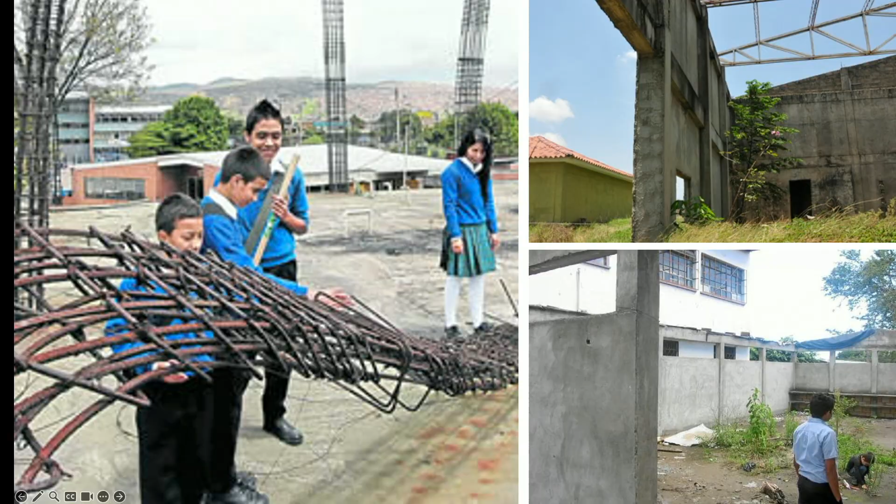It all started when we finished architecture school and had my first job working for a professor, seeing how a lot of the work that we were doing ended up in rolls and flat files and nothing happened of it. Granted, many times, if the financial conditions don't allow for things to happen, like holes get dug and spirals don't get built. But a lot of what we were doing was actually dealing with bringing infrastructure to these really poor settings around Colombia. And the idea that we were producing files and printing them and jumping onto the next one started bothering me.

Because I grew up learning that architects are kind of this, right? They are these people that go out there on sites and inspire their workers and know how to build and know how to cut stone and know how to do things. And this is what we were doing.

Soon enough, I realized that it wasn't just this perception I was getting, but it was a generalized idea. In 2011, Obama was invited to the Pritzker Award ceremony. He went up on stage and said, as Tom mentioned, my interest in architecture goes way back. There was a time when I thought I could be an architect, where I expected to be more creative than I turned out. So I had to go into politics instead, and everyone laughed.

I was very furious at this phrase, because here's this guy that I truly admire saying that we are the lucky ones because we're creative, and this poor guy, he's not creative, so he has to be president of the United States. This notion that since we're creative, we're lucky really started bothering me, and I wanted to change that.

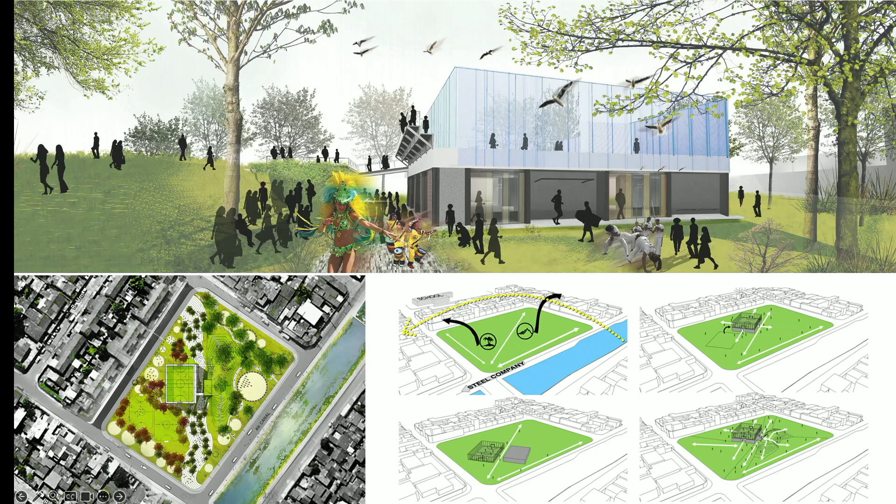So we did a new thing, but ultimately what was important for me is I got the possibility of being in the middle of everything, which I thought is where we should be, because I was handling the donations, handling the site, dealing with the mayor's office, dealing with the client, dealing with the community, and ultimately doing the project. It was this weird location in Rio that no one really knows about, way, way out west.

It's not the beautiful beaches or the kind of more Hollywood-esque favelas. It was the truly deep Rio that no one talks about. It was this kind of abandoned soccer pitch, and we redesigned the project. I did this process where I would go and present it to the community and get their feedback and see how we could improve it or change it or make it better or worse.

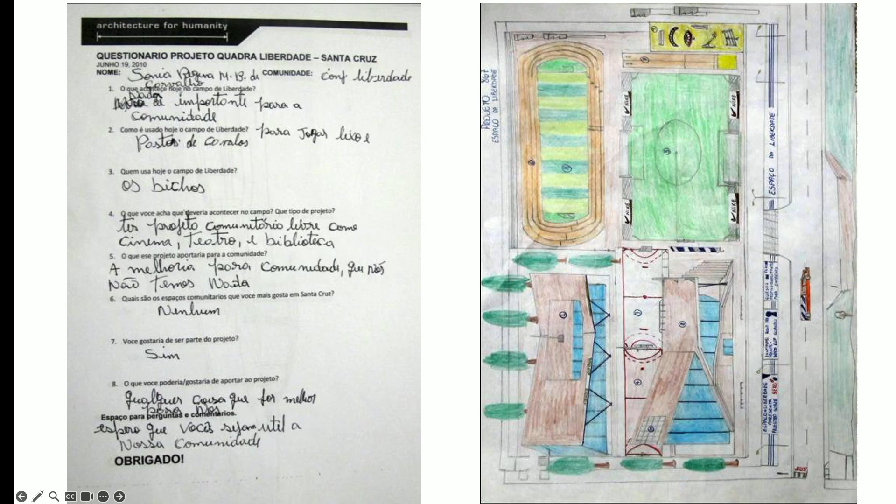It was just a really small project, kind of this small ramp with a soccer pitch in front of it and a small multi-use room inside. The idea was to create a theater on top, and then the educational and soccer spaces on the bottom. And four months into my life in Brazil, I was able to begin the construction of this project.

That was really amazing for me, although the community was still kind of not convinced. This is a very telling image of what every day looked like. I did a lot of local hiring along with Getulio. He's the community leader, and he helped me hire locally.

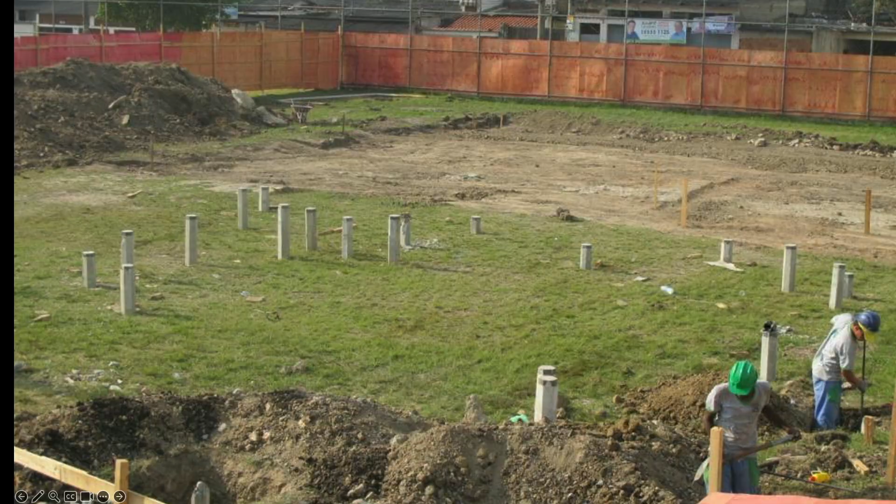Construction began, and I was living on the site, really dealing with the realities of being an architect who builds his own projects, kind of struggling with all the decisions I had made because I couldn't go back on them anymore once they were built. A year out of architecture school, I was doing this and dealing with the other complexities of being in these settings, because it was during a political cycle.

Over here you can see this is Dilma, she wanted to get reelected, and there was Lula and so on. We had a lot of these political caravans saying that they were doing the project, so I had to do community meetings that kind of looked like this on this street.

Oh, I don't know what this...

How do I get out of this? Okay.

Meanwhile, the process was continuing to happen, and when we hit the stage of the ramp starting to be built, rumors that we were doing a second-level highway on top of all the rural fields started to emerge. So I was able to get a spot on community radio every Wednesday at 1 p.m., where I'd do a show with Colombian music and answer phone calls to deal with all the rumors that were going on.

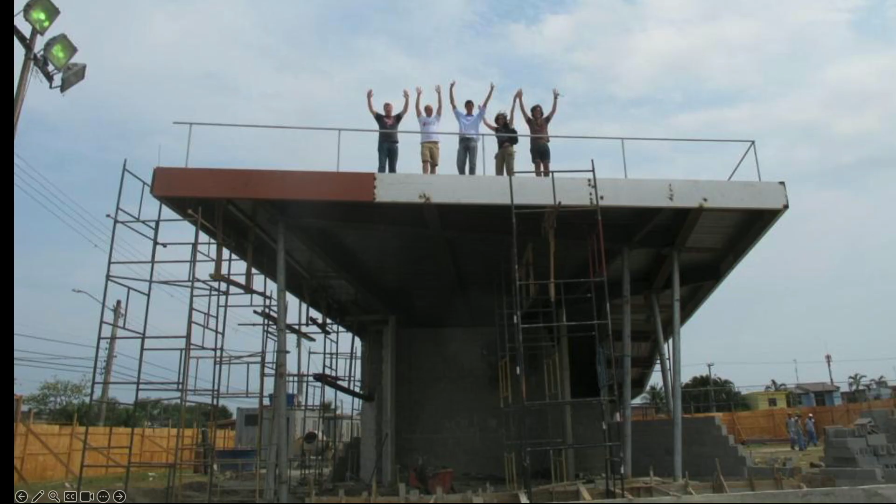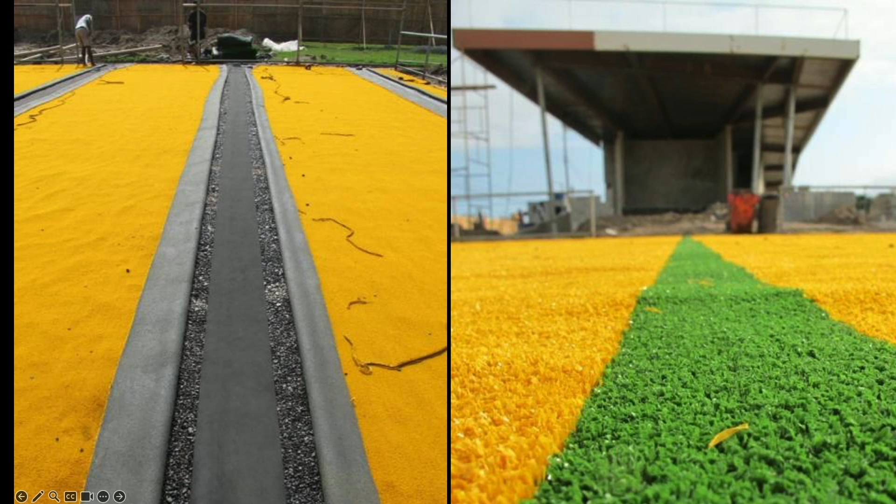We tore down fences and reutilized them to build the new fences for our soccer pitch, and brought really high, top-of-the-line finishings. Well, it wasn't marble, but it was really good finishings to a site that wasn't used to getting high-quality architecture built in it.

Ten months after I moved to Brazil, I was very happy to open the project to the community, and we had the men's and women's homeless World Cup teams of Brazil play the first game on our pitch.

Throughout this whole time, my parents were very scared that I'd moved to a favela, worried about what was going to happen to their kid. So I set up a blog where I would post pictures of the progress of the job every evening.

For some reason, the First Lady of Colombia saw that blog and learned there was this young Colombian architect who liked to go to difficult places and build with communities. She contacted me and said she wanted to set up a program focused on bringing high-quality services for early childhood to the war-torn areas of Colombia, and asked if I wanted to be her architect. So I moved to the presidential palace from the favela, and I started learning a lot about early childhood.

I was struck by the notion that the best investment a country can make is in early childhood.

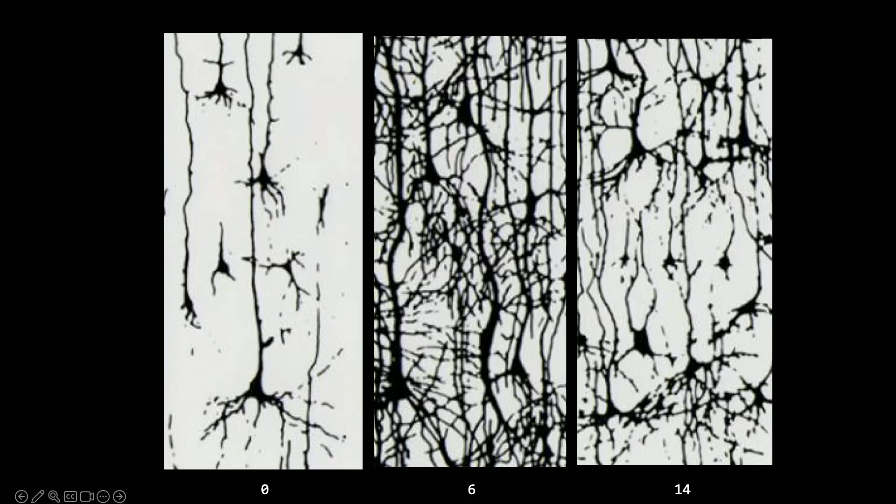This is a CAT scan of a child's brain at 0 years old, 6 years old, and 14 years old, based on research done by James Heckman at the University of Chicago. He was able to prove that most of the neurological activity in a child's brain peaks at age 6, and from there things solidify and decline. So whatever you can do from 0 to 6 years old is actually the best investment a country can make in itself.

With that understanding of the importance of what we were about to embark upon, we met our first site: a town called Villarrica, 16,000 people, 67% poverty rate, 20% illiteracy rate, a typical Colombian rural reality.

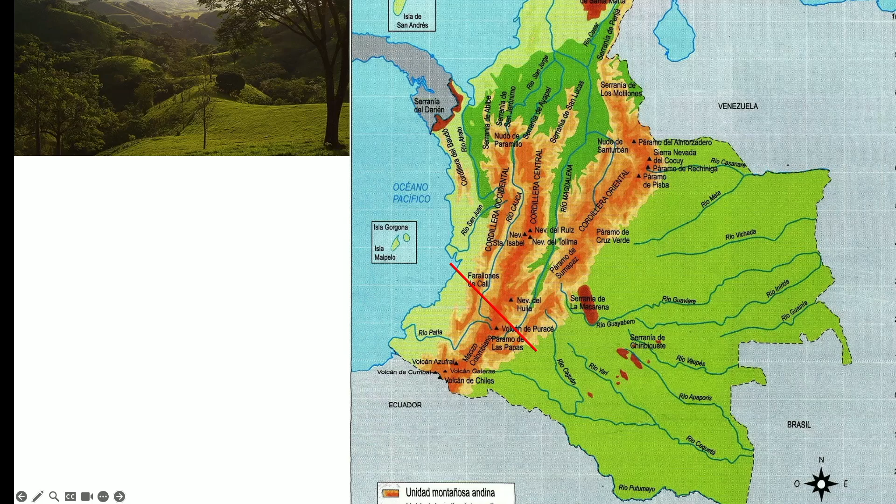But one you can understand through its geography, because if you were to follow this red line on the screen from right to left, or bottom to top, you'd start in the Amazon jungle, then go through the snowy peaks of Cauca, and end at the Pacific coast. This means you have every type of soil you want in the world, and access to the ocean, like you've seen in the movies about Colombia.

On the other hand, we're on the equator, which means the rain cycles are hyper-accelerated, so we permanently have rain, condensation and evaporation happening at the same time. This is the cloudiest and most humid part of the world, which also means you can't patrol it by air. That's why all the drugs end up leaving from the Pacific coast.

And sure enough, that's where Villa Rica is. While we were doing the project, the police station got bombed twice. These were the realities we were dealing with.

We were also dealing with the reality that the kids' kindergartens at the time were just homes of very humble, hardworking women offering a room in their house to run a kindergarten. So we started visiting these homes to see what we could learn from the work they were doing, and held a lot of community meetings to see what the kids wanted, what the teenagers wanted.

They wanted a cinema, a catwalk for hairdressing pageants, and all sorts of other things, along with what the mothers and the community wanted. We ultimately did a project inspired by bamboo groves, which are native to this area but have mostly been cut down for sugarcane fields.

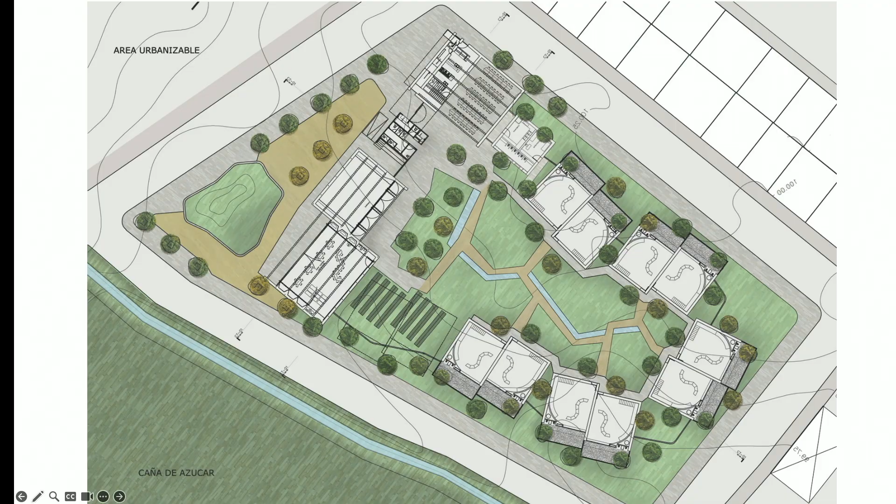We proposed to do this project we call El Guadual, the bamboo grove. It's a kindergarten with 5 different pairs of classrooms around a central courtyard with a little string of water, and a more communal block in the front that opens up to the street or to the back. These were the drawings we brought to present to the community.

What we were really doing was trying to work with what was there, because these are places you can't really bring materials to — you get guerrilla checkpoints, and when you're bringing materials they steal them from you and the project gets defunded. You don't have permanent water or electricity. So I wasn't necessarily an environmental or green architect, but the realities pushed me towards becoming green by design, not green design.

We worked with local materials and local workers. We designed systems that would bring sun in so we wouldn't rely on energy or ventilation systems, and we would be able to collect all the rainwater we could, learning a lot from the place through all the visits we made to the houses.

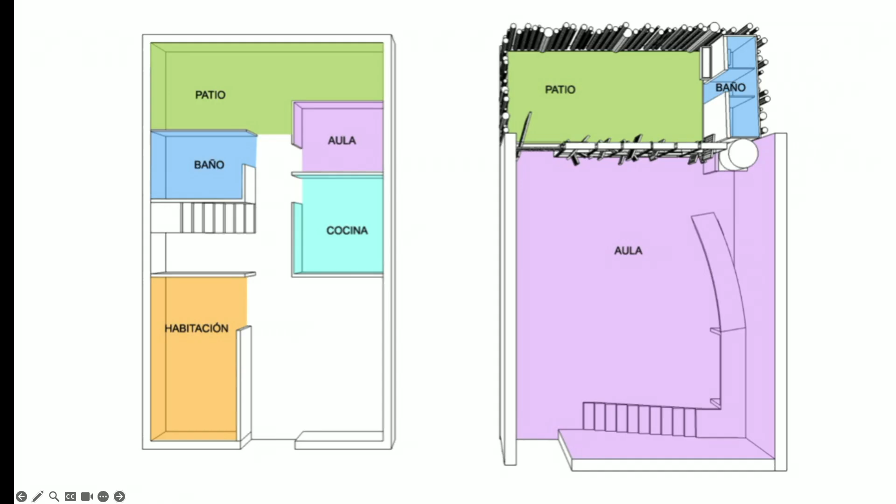On the left you see the floor plan for the house I showed you, Sulman's house — the purple square was a classroom. What was beautiful about this kindergarten inside this woman's house is that when the kids wanted to go out to the field, they could run out and play with the lizards. If they wanted to go to the bathroom, they could just go. If they were hungry, they'd go to the kitchen.

If they were tired, they'd go into her living room — versus what we were seeing in other kindergartens, which were just very clean, simple, squared rooms, where a kid who wanted to go to the bathroom had to ask the teacher to bring him, or wait for recess to go outside.

When we thought about what that does to a child's brain, it basically limits the possibility of being a decision-making individual, because everything in the day is plotted out and decided for you — versus what was happening in these homes, where kids decided what to do, when, and how. Considering that after kindergarten these kids enter school, and in school they have to choose which side of the war they want to be on, the possibility of seeing more options and becoming a better trained individual decision maker became really important for us.

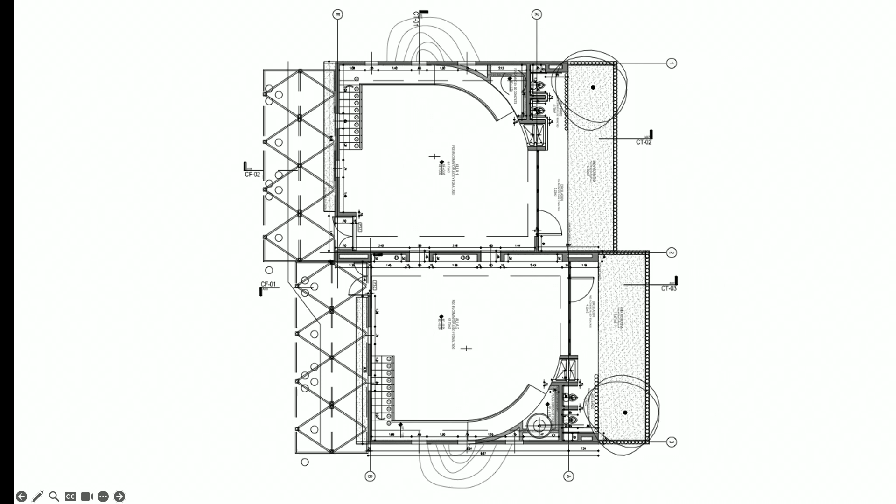So the classrooms we designed ended up having their own bathroom, their own patio, their own stairs, 7 different ways of going in and out. They were interconnected to the classroom next to them, with little mountains to go out onto. The teachers found it very difficult to teach in these rooms, but it was great for us because we were forcing the teachers to pay attention — they weren't controlled, they were really able to be wild and go all over the place.

We presented the project to the community, and thankfully it was approved. A typical construction process started, except we could only do one shipment of materials — the second always gets ransacked by guerrilla checkpoints. So a lot of what we did was plan on building with local knowledge and local materials.

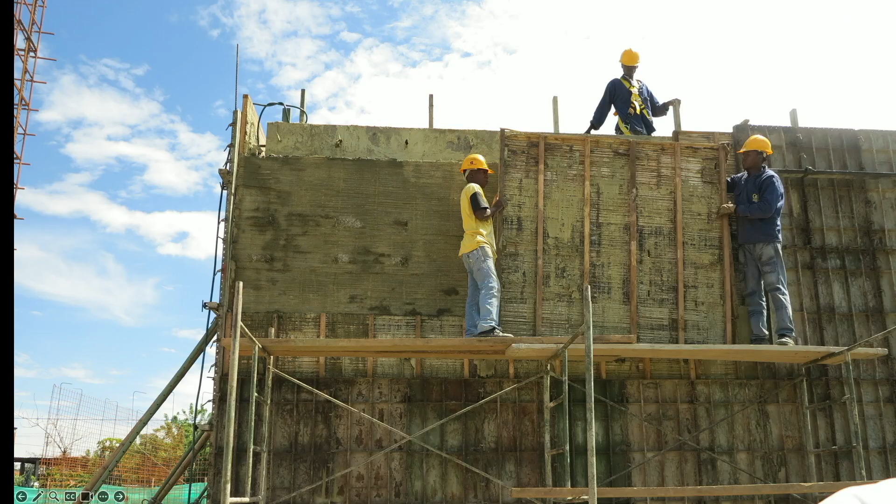We made the formwork out of bamboo sheets that the local builders used over there. We trained the women who were going to be the teachers to also be bamboo workers, so they could offer maintenance services afterwards and hopefully keep the place going well.

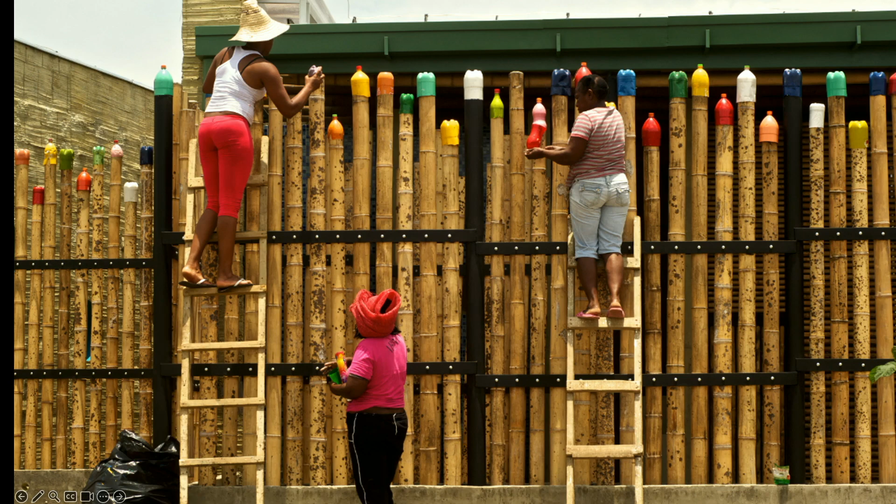We also did one specific strategy I was super proud of: we built a fence out of bamboo. The builder didn't want to do it because bamboo collects water since it's hollow in the middle. So we asked the mothers who were going to become teachers to collect soda bottles and paint them with their kids.

They had collected a bunch of soda bottles throughout the whole construction process. When the builder told us he wasn't going to build the fence unless we accepted an additional cost of PVC caps—4,500 caps, totaling about $10,000—we asked the women to bring their bottles and install them themselves.

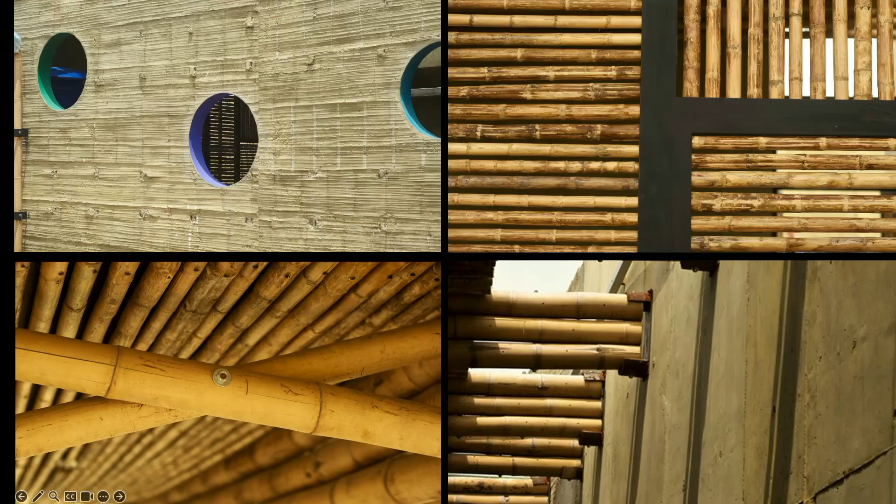This is what it looked like in the end. You could see the kids going up and down the mountains and crossing over, sunlight coming in, water being collected—all these things we were dreaming we could accomplish in this very forgotten rural area.

There was the outdoor movie theater the kids were asking for, and a bunch of other things. Word got around that the First Lady was doing this, so municipalities all over the country started asking for the same attention. We went up to the jungle and found a community that clearly needed shade, so we built a big shady kindergarten for them.

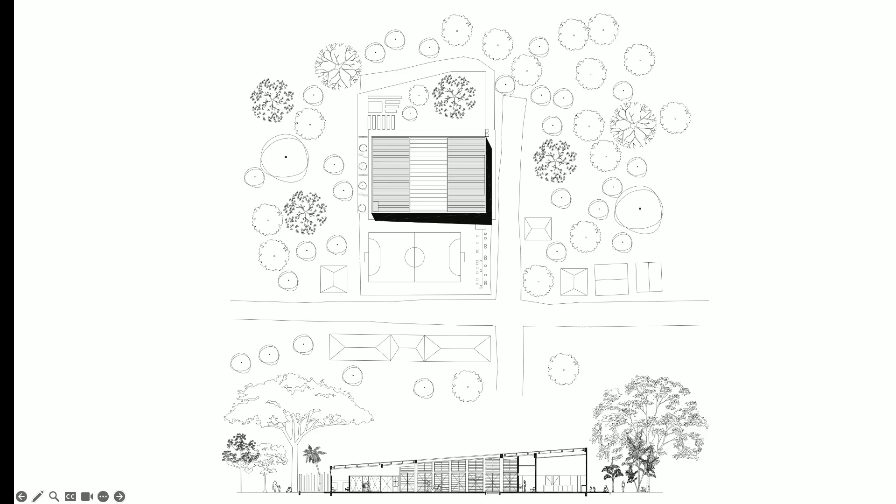Kind of a similar process. I'm just going to go through these really quickly. Five minutes? Oh. Okay, mentira—I thought I had 30 minutes, not 20. Anyway, that's tough, but we kept doing these projects all over the place.

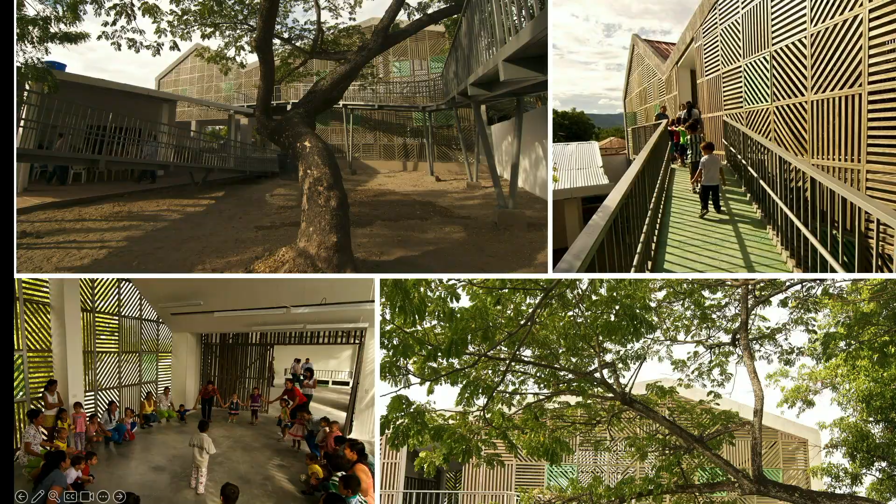Ultimately we built 32 kindergartens in those four years I was there, and it even became political propaganda. I was then offered the opportunity to go study in the US, and after a couple of scares throughout the country, I decided to take it.

When I finished school, I came back home and tried to operate the same way, but in an urban setting, which was a different challenge because there's more commercial interest involved. I understood that operating in the urban setting with the same mentality meant trying to find forgotten pieces of history that were close to extinction but had value for the place.

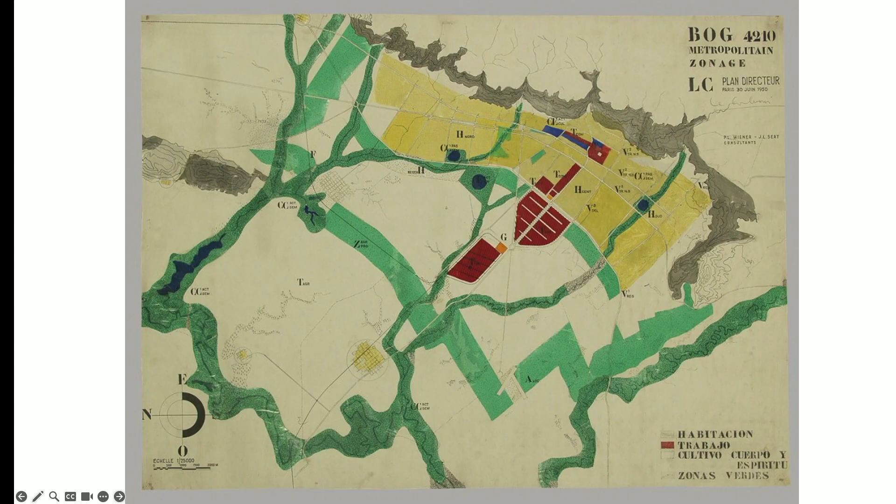Very few people know or even cared, but Le Corbusier did a plan for the future of Bogotá in 1950. None of it got built except a small, odd red polygon meant to be the industrial zone. The city grew immensely, and that industrial zone—planned to be the edge of the city—is now in the middle of it, the biggest collection of industrial buildings from the 1950s, which sadly at this point mostly don't operate anymore; they became obsolete.

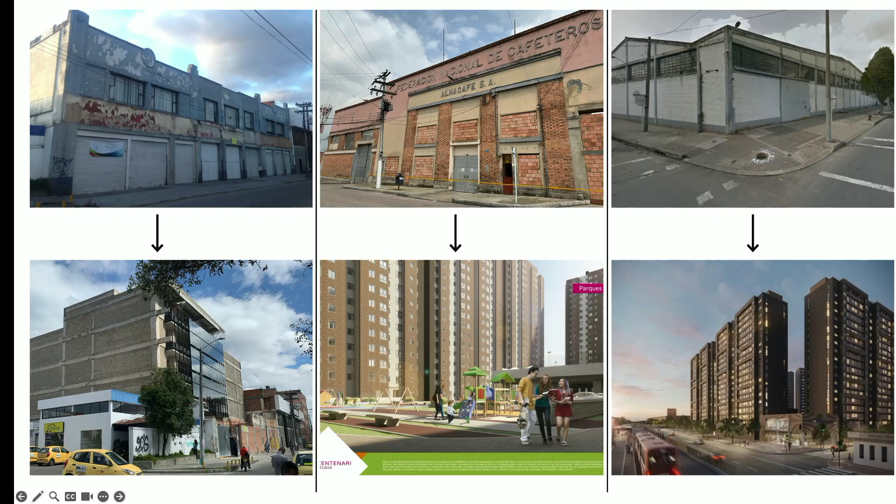Industry doesn't fit in the industrial zone anymore, so a lot of these buildings are getting bought up to be torn down and turned into gated communities. I decided to come up with a project no one asked for, to present a different way of developing the future of the industrial zone.

It became a research project and also a policy proposal for the city, suggesting a different way of using incentives to preserve these buildings instead of allowing them to be torn down. I did a full master plan for it, with ideas on how this could look and how living there could be.

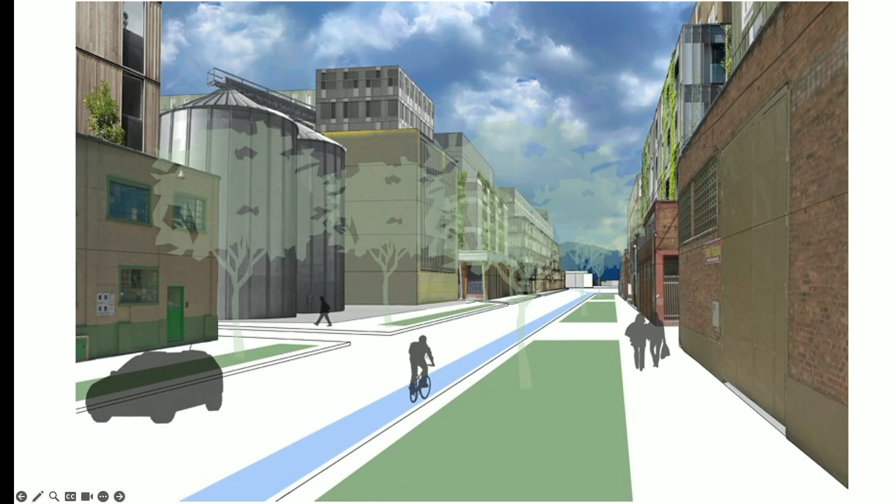I presented it to the planning office, and they congratulated me, thanked me, and showed me the door. I also presented it to a couple of private investors who said, listen, I don't want to be the first one—go ahead, do it, and when there's a market, I'm interested. I don't want to be the pioneer.

With the money I'd saved from working in the US, I turned the warehouse into studios that I then had to go market and find clients for. Fortunately, I was able to create a market that those developers didn't think was possible, and these spaces have been rented out for the past 10 years now.

Even these little office spaces, I turned into my house, and I was the first person to live in the industrial zone in Bogotá, a little bit illegally, but we're still there. With my partner, Anna Sokolov, we realized that if we really wanted the city to care about this place, we had to create an open public space, not just these closed workshops for people who pay rent.

So we were able to purchase this other warehouse that was in intense disrepair. It was an old car shop that was really falling apart. With really small architectural moves, we did a lot of maintenance on it, and turned it into a public space for large-scale historic art installations. While we were operating the art space, we also started modifying the rest of the building to turn it into our house.

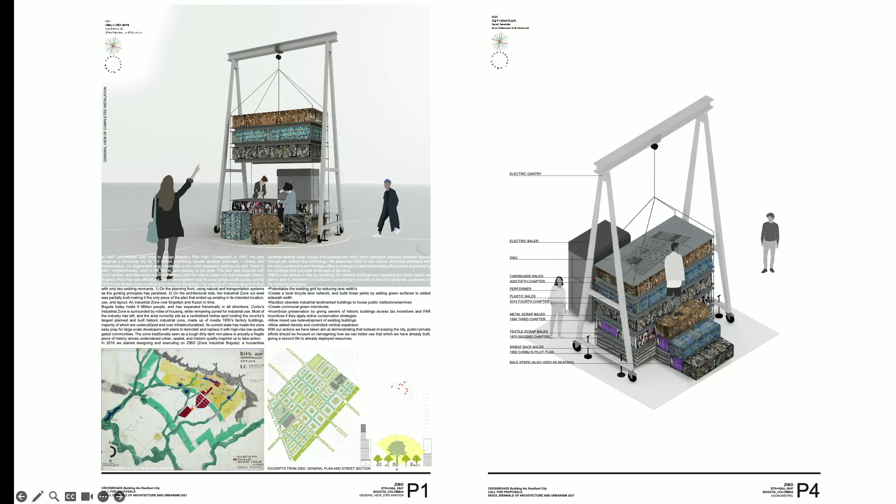I'm not going to talk about my house too much, but what's important is that throughout this whole time, this big urban project that I had proposed to the city actually got awarded in the Oslo Triennale. It was part of the neighborhood index, and it also was awarded in the Seoul Biennial of Architecture in Korea. The mayor changed, and the new mayor came in, and she learned about what we were doing and asked me to come in and present to her and to the planning office what our vision for the future of the industrial zone was.

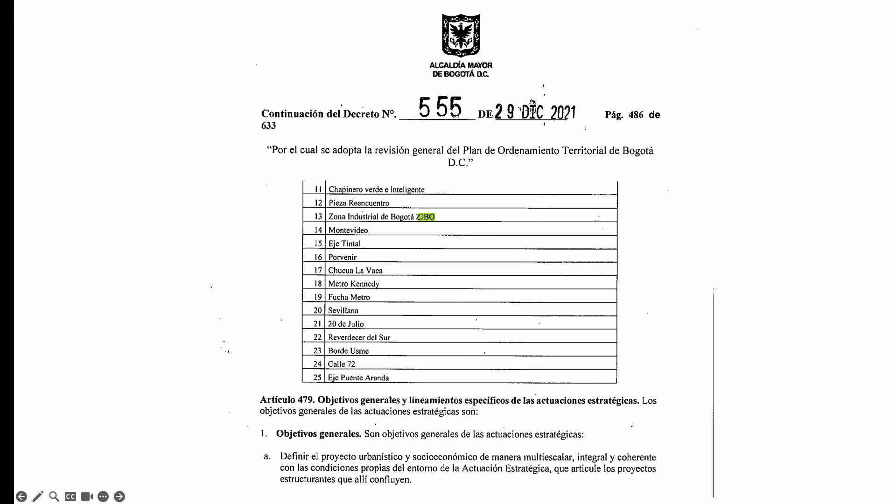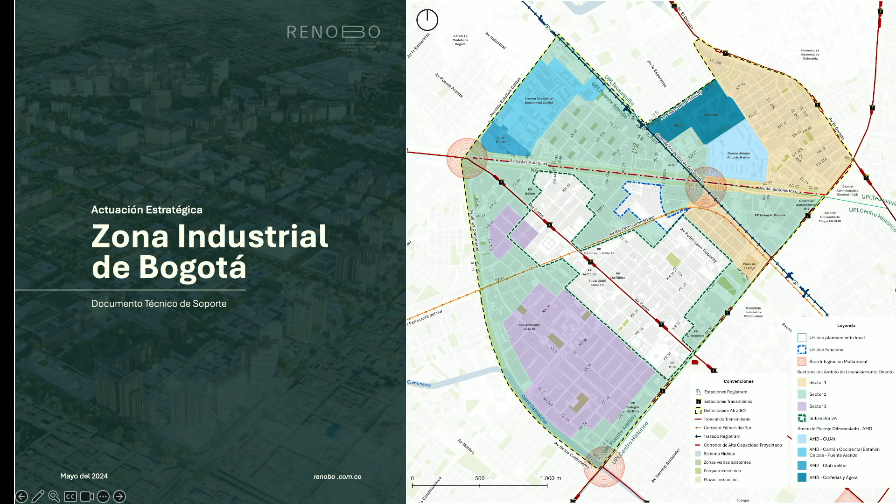They were in charge of changing the land use plan for the next 20 years, and they bought it. So we ended up having our project become public policy. As you can see, in 2021, the Plan de Ordenamiento Territorial, which is the land use plan for the next 20 years of Bogotá, included number 13, the industrial zone in Bogotá, as a specific place that needed a specific code and rules on how it's going to be developed. The Urban Renewal Company of Bogotá ended up being responsible for that, and they hired me as an architect, their head architect and advisor for the CEO, to help define the future of this place and many others in Bogotá.

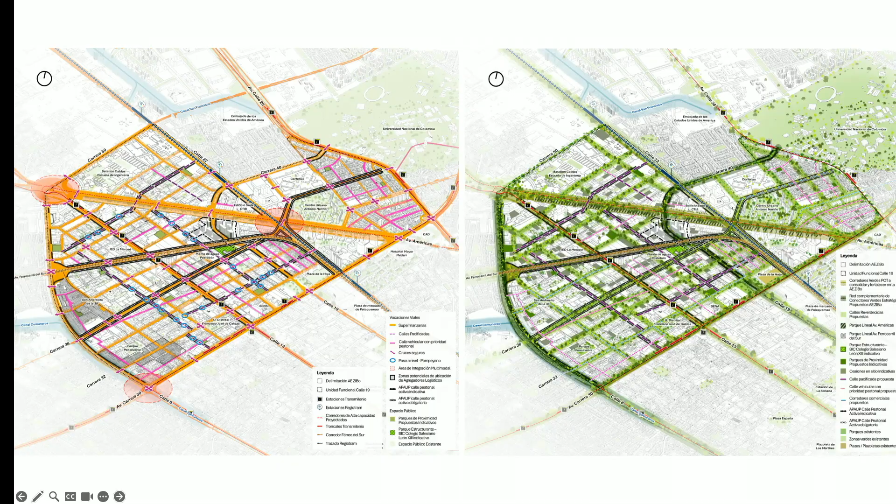So this little part that you see without shade is the one that ended up receiving all of these incentives for the preservation of the historic part. It's a broader project now, obviously, and many more systems are taken into account, but this is another representation of the rules that I've been playing with for 10 years to develop this part of Bogotá and the way that it is.

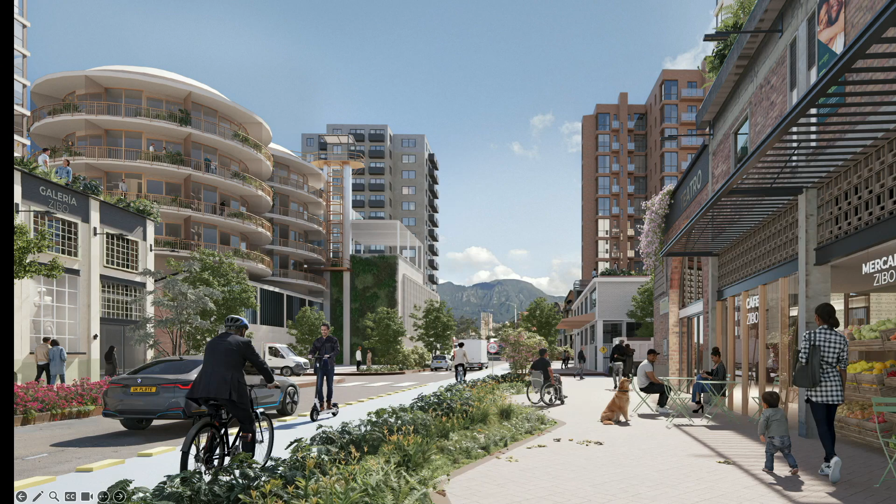Now the mayor is very happy to present the future of the industrial zone like this versus what it used to be with just tearing down and building gated communities. And in a funny way, this kind of obsession and dream for the development of the future of the industrial zone in Bogotá is kind of what brought us here to Nyhamnen, where we are right now in Malmö.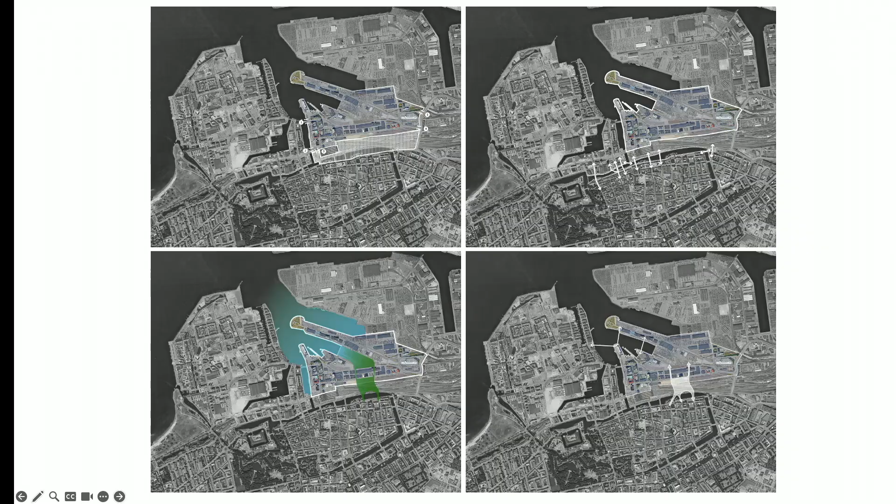When we came here, we were asked to give value to the place and help create an understanding of how it could be developed by giving new uses and new value to what exists there, by caring for it and maintaining it and not just tearing it down.

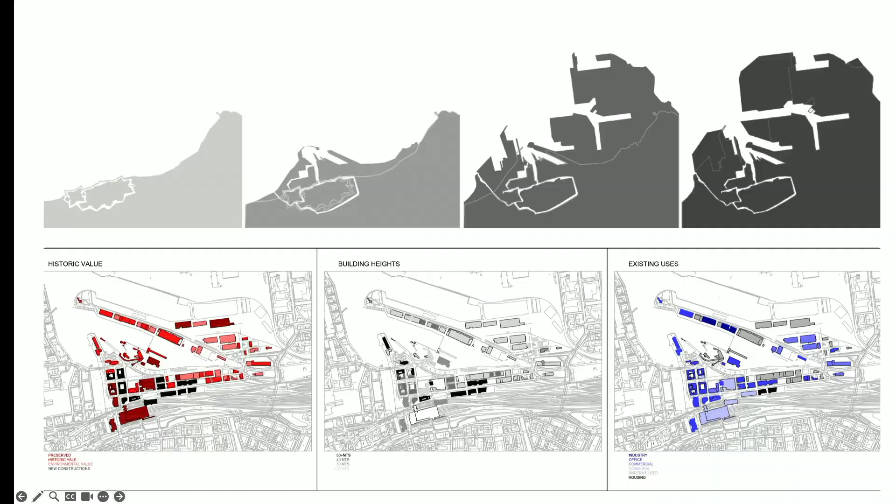So we did a lot of these urban studies on what could be done and what was the condition of Nyhamnen at the moment, and also the historic reality of why it is what it is, and these more traditional kind of inventories of the place. We were asked, and one of the things that the contract asked for, was to do an inventory.

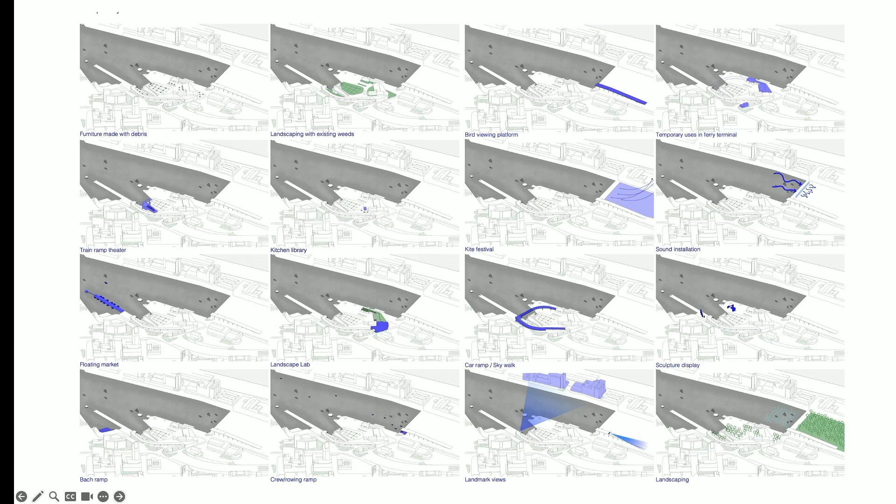So we did the normal ones, but what we did that I think was important is we did an inventory of activation strategies, because we realized the biggest problem the place had at the moment was that nobody goes to it—they think it's far, dark, dirty and scary, even though it's super close by. So we thought that by activating it, we could change the narrative of the place.

We assembled all of those activation strategies in this image, within this concept we developed for the future of Nyhamnen as a multi-species, food-driven neighborhood centered on reutilizing the existing historic built environment. We were also asked to develop an example of what that could look like, and we were fortunate to develop 3 examples out of the 16 activation strategies so far.

The first one was this train ramp. Maybe some of you have seen it, or used it when the ferry was still active, but it's a train ramp that has been sitting empty for 25 years. We thought this could become a theater.

So we found pieces of concrete and old tanker ropes that were donated to us by a shipping company, and we turned it into a theater. It can sit 120 people, and we felt that offering an infrastructure for cultural events was an important first step in allowing people to start coming there and occupying the place.

And if you were to go today, it's open—it's an open air theater. We also wanted to do a more symbolical project, in a way. We call it the urban tapestry.

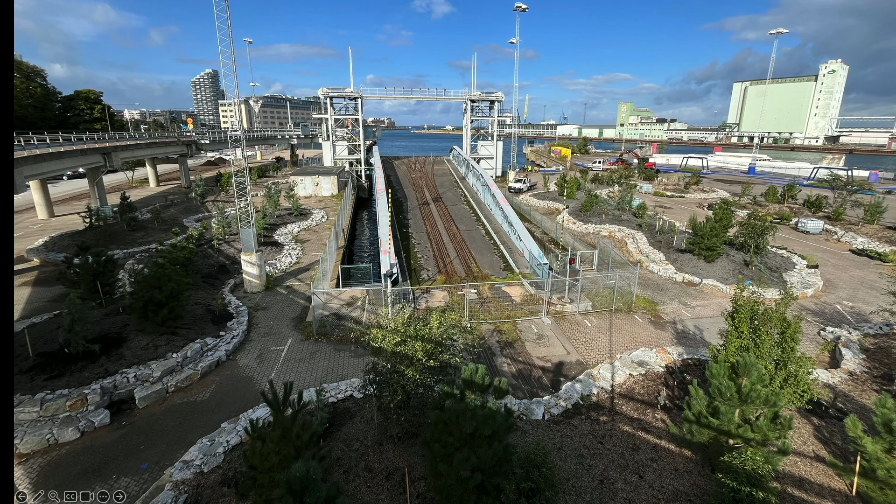This whole thought process we've been developing for Nyhamnen—we were also lucky enough to be invited to present it at ArkDes, open for the public in Stockholm last year. We've now taken it down and have all the pieces here, and we will install them in the public space in Nyhamnen hopefully soon.

And ideally, if all works out, there's more stuff we could do. Thank you.